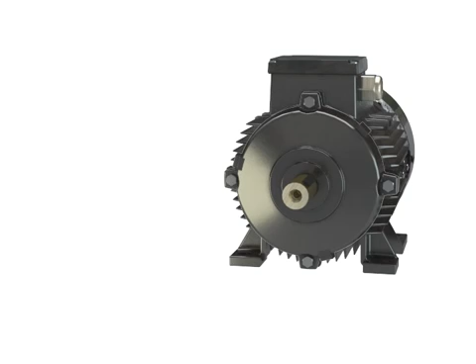The three factors that determine the type of work a motor can produce are speed, torque, and horsepower. Speed is defined as how fast the motor performs its work. For example, a shaft can rotate slowly or quickly. The typical units of measurement for rotational motor speed are revolutions per minute or RPM.

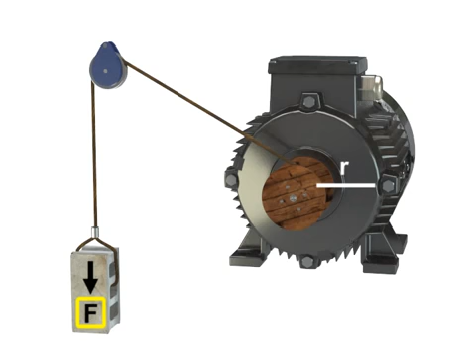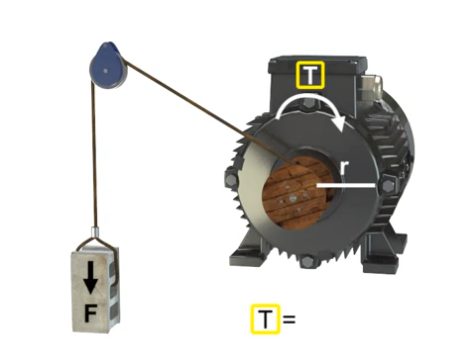Work is defined as a force applied over a distance. In the case of flywheels, winches, and motors, the work is called torque. Torque is a special type of work that produces rotation. Torque occurs when a force acts on a radius. Typical units of measurement for torque are pound-foot. The torque illustrated here is equal to 1 pound-foot.

Horsepower is defined as the rate at which work is accomplished. Years ago, before motors were invented, most work was accomplished manually. It was estimated that one horse could accomplish approximately 33,000 pound-foot of work per minute, and thus the term horsepower was born.

In modern terms, horsepower is simply another unit of measurement for power and can be translated into watts, BTUs, joules, or any unit of power. Units that measure motor power are typically in horsepower or watts.

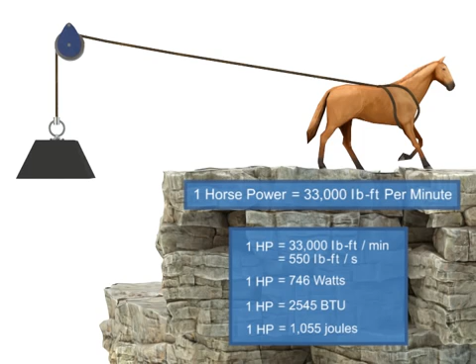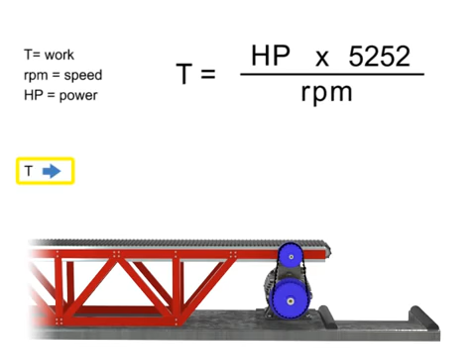You can manipulate the connection among speed, torque, and horsepower by understanding how they are related. The work accomplished here, the torque, is represented by the weight moving along the conveyor. If torque remains constant, speed and horsepower are proportional. As the speed or RPM increases, horsepower increases to maintain constant torque. If speed decreases, horsepower decreases to maintain constant torque.

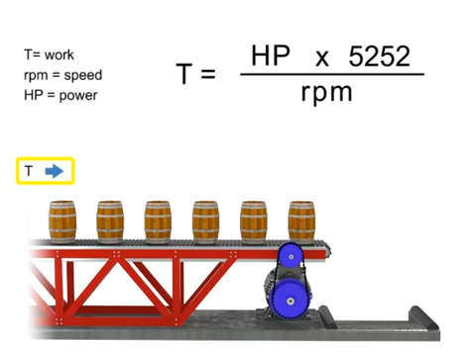Let's say we wish to keep torque constant but want to increase the production of barrels. If the torque or number of barrels on the conveyor belt remains constant but speed increases, then the horsepower of the motor also increases. In other words, a more powerful motor is required to produce the same amount of torque more quickly. Similarly, the opposite is true. If we wish torque to remain constant and decrease speed, then the horsepower of the motor also decreases.

If speed remains constant, then torque and horsepower are proportional. As the torque increases, horsepower also increases to maintain constant speed. As the torque decreases, horsepower also decreases to maintain constant RPM.

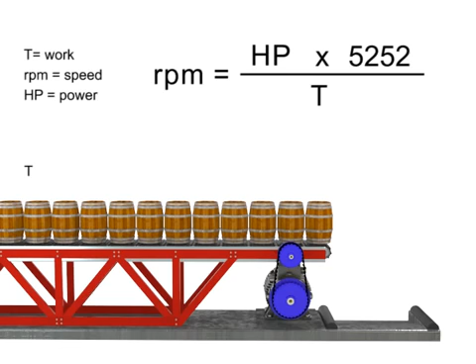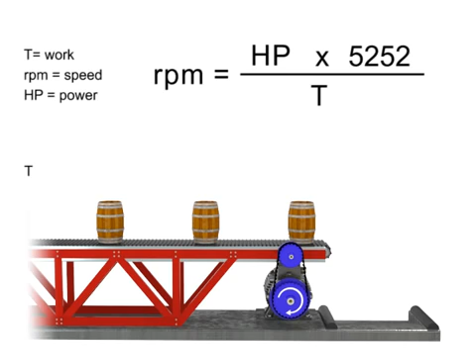Let's say we want production to increase, but the speed of the conveyor to remain constant. If torque increases, horsepower also increases to compensate. This means a more powerful motor is needed to produce more torque at the same speed. Similarly, the opposite is true. If we wish speed to remain constant and decrease torque, then horsepower also decreases.

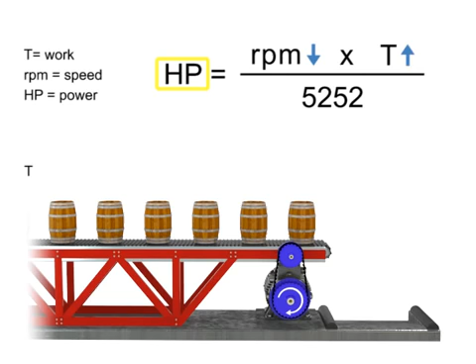If horsepower remains constant, then speed and torque are inversely proportional. As the torque increases, speed decreases to maintain constant horsepower. As torque decreases, speed must increase to maintain constant horsepower.

Let's say we want the horsepower of our motor to remain constant, but wish to increase the torque. If torque increases, the speed of the conveyor decreases so that the horsepower required of the motor remains constant. Similarly, the opposite is true. If the torque decreases, the speed of the conveyor increases and the horsepower generated by the motor remains constant.